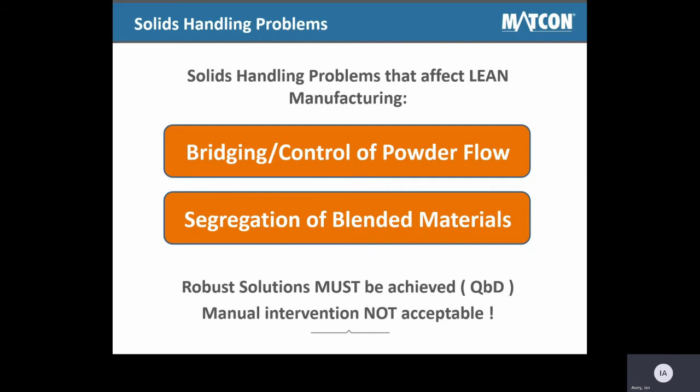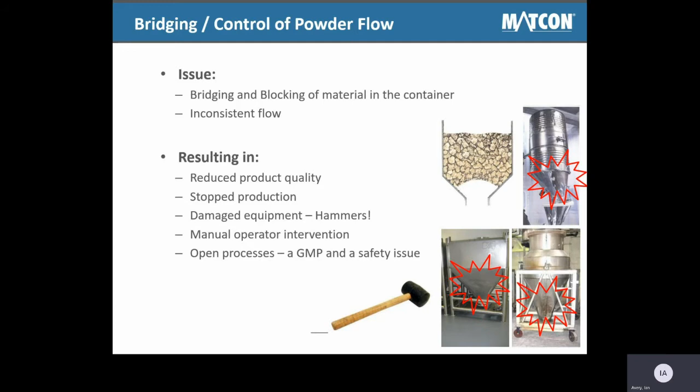These rarely are the best form of equipment care. Perhaps worse than this is the likely reduced efficiency and quality of the resulting product. How much better is a process that works consistently and repeatably without random operator intervention?

When transporting and discharging any powders, there are two primary aims. The first is that the materials can be discharged in an automated and consistent way. Repeatability of processes without manual operator intervention improves efficiencies and forms part of any ambition to work within a lean environment. The second is to ensure that the materials that are discharged are the same as those that were introduced previously into the container. This means minimal segregation of the output, a problem that can often occur when smaller traditional discharge valves are used.

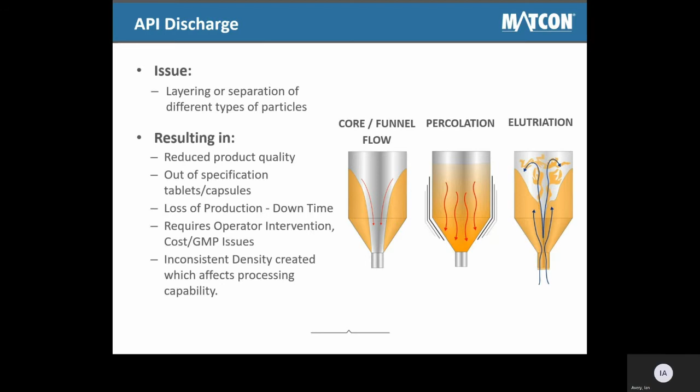So what solutions can sites implement to solve these potential flow and segregation issues? We believe the best solution is the cone valve linked to our IBC and dedicated discharge station. With gentle opening and closing, there's no degradation of product. The shape of the valve allows mass flow of the product out of the IBC. This flow negates any tendency for powders to segregate and provides consistent and repeatable discharge of products.

The variable lift height of the cone opening provides the control of discharge rate, and even the most problematic materials can be processed by the addition of vibration on the cone or the external frame. Flexibility of batch sizes can be accommodated with standard IBC volumes ranging between 300 and 3,500 litres.

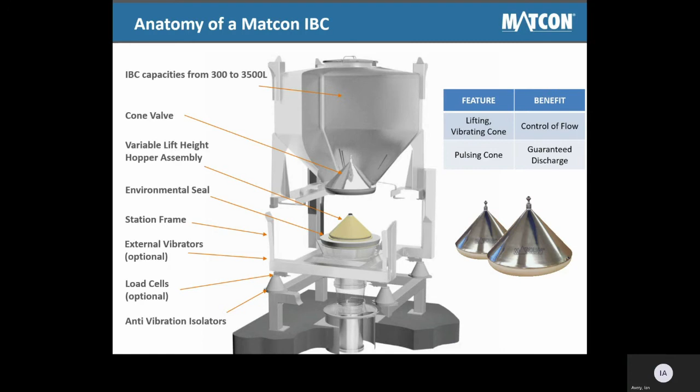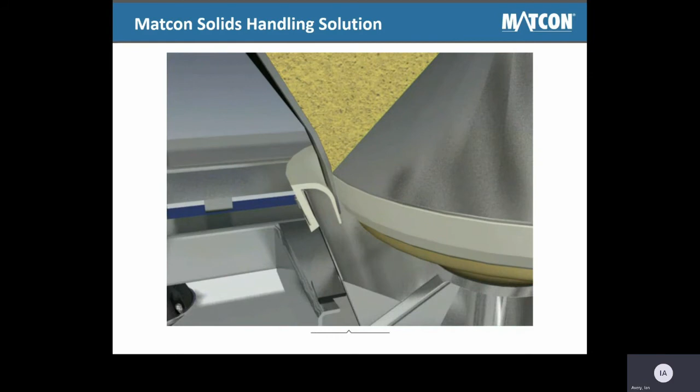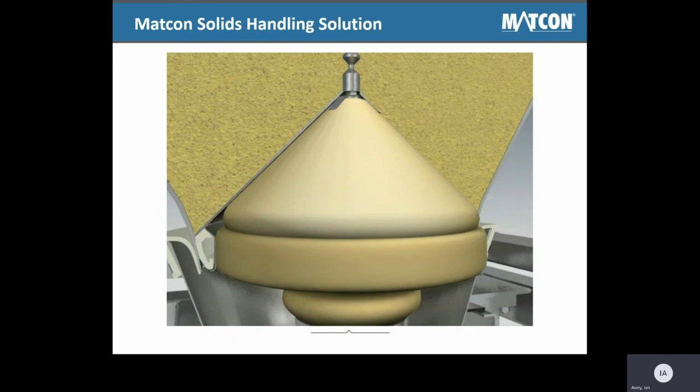Here we can see a schematic of the cone valve and discharge station in action. The IBC cone valve docks with the discharge station. This self-seals, preventing powder loss to the outside environment. All materials are suitable for a pharmaceutical environment and provide excellent access for cleaning and inspection.

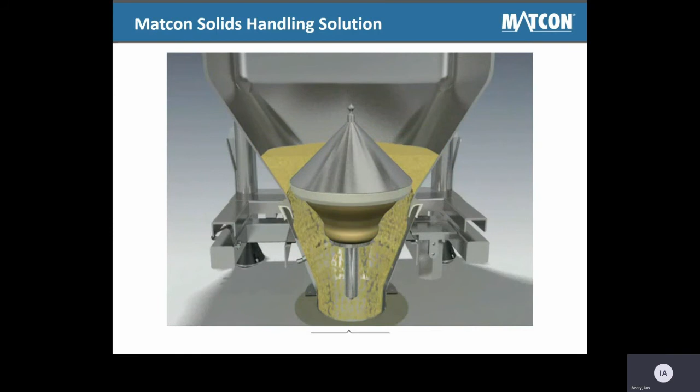The control of the discharge station then lifts the valve to a predetermined level, providing excellent control of powder flow. In this example, optional vibration of the cone aids discharging problematic materials by movement of the cone entering directly into the powder within the IBC.

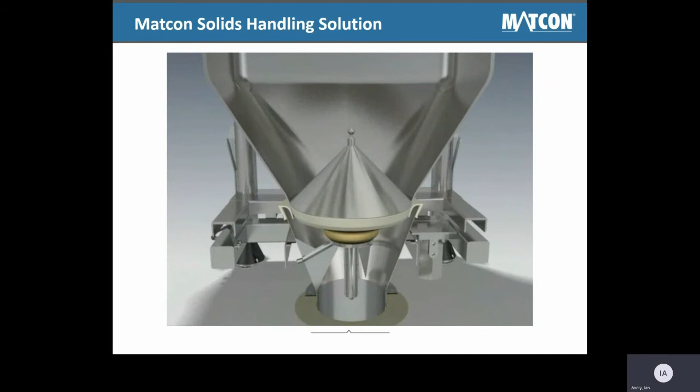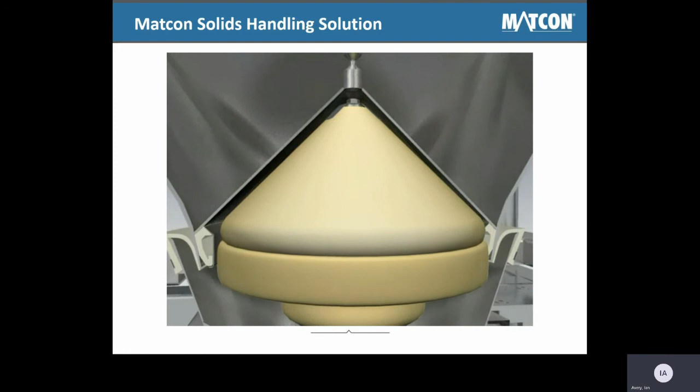Mass flow of product ensures a complete discharge without common problems of other systems such as rat holing or bridging. Powder flow can be stopped and started to feed other process equipment such as tablet presses or capsule fillers.

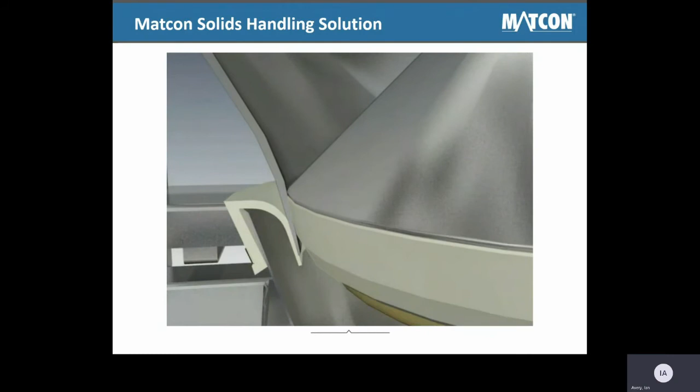On completion of the discharge, the cone valve closes and is sealed within the IBC. This helps keep the system clean and efficient, allowing best utilization of process equipment with minor operational intervention.

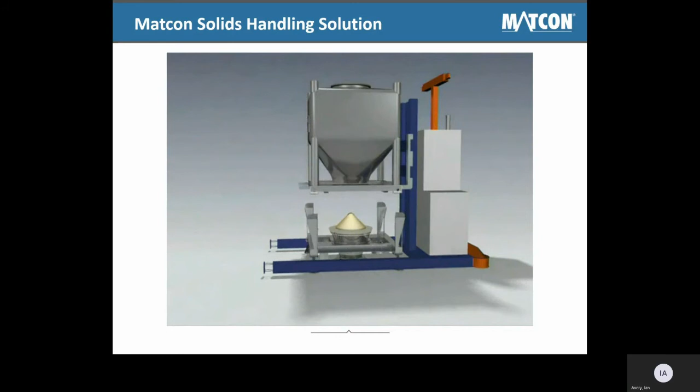In the final section of this brief presentation, we'll look at some options for layouts of pharmaceutical manufacturing plants. The first is perhaps the classic historical method using vacuum or pneumatic transfer to move product between processes. The other three examples show how Matcon IBCs and gravity transfer increases efficiency.

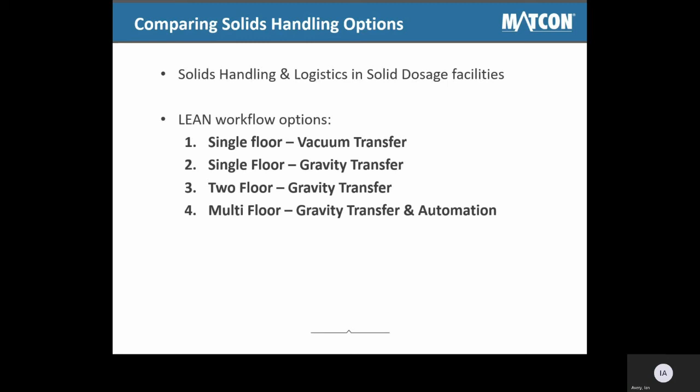So to begin, this is perhaps a classical traditional layout of some pharmaceutical sites. Materials are transferred to each process by a combination of manual handling and vacuum transfer. Although initial costs may be lower, the ongoing running operation costs can be greater. There are also risks involved in segregation during transfer and exposure of operators to product.

The use of equipment such as V-blenders also makes for inefficiencies due to cleaning downtime. The blender must be taken out of service to clean.

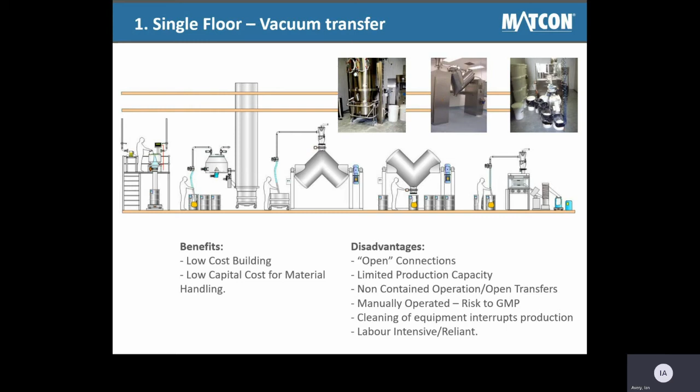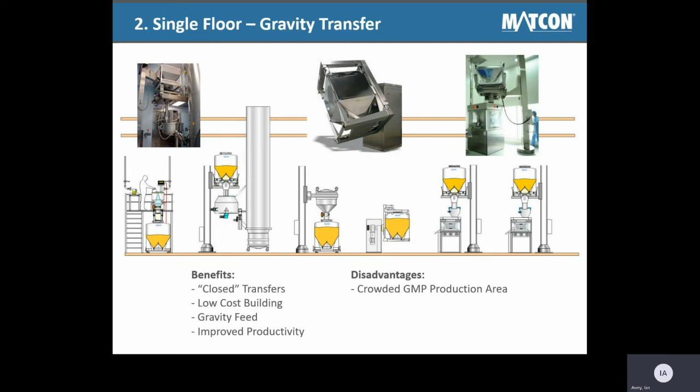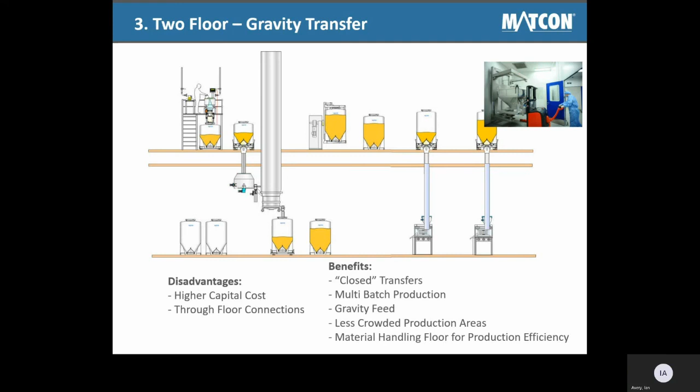Finally, for this presentation, here's an example of a multi-floor facility using Matcon IBCs. This provides the ultimate flexibility in manufacturing whilst improving equipment utilisation. From initial sack tipping of ingredients through to tablet processing, all materials are handled securely and efficiently.

In this example, the Matcon range of tablet IBCs are also shown, bringing improvements to material handling post-compression and through to coating and even packaging. The gentle handling of tablets in this way reduces manual intervention and numbers of containers compared to traditional small tablet kegs.

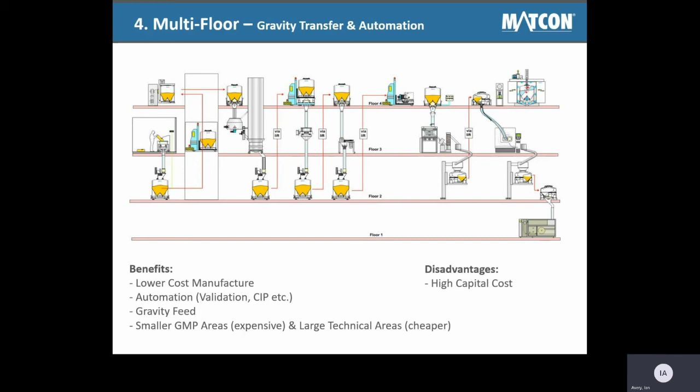Here's a simple schematic of how Matcon can improve material handling within a pharmaceutical environment. Transferring product efficiently from fluid bed in-bin blending using Matcon blenders ensures maximum equipment utilisation.

Discharging to a tablet press with the cone valve provides excellent material flow, even for difficult products, whilst negating segregation risks. Manual intervention is minimised and efficiencies and quality maximised.

This follows through also to tablet handling. These non-metallic tablet handling IBCs ensure gentle, efficient storage and movement of tablets within facilities and then onto packaging.

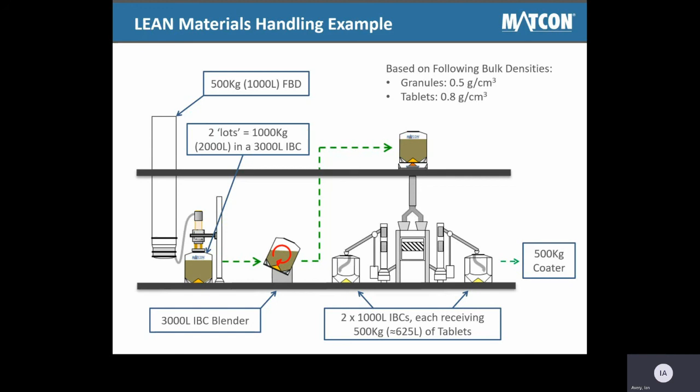So in conclusion, the Matcon system can provide pharmaceutical manufacturing sites with significant long-lasting benefits. Manufacturing costs can be reduced by improving equipment utilisation, such as blenders, and reducing manual intervention.

Efficiencies are improved due to better discharging of products through the cone valve and fewer material movements. Quality is enhanced by negating tendencies for segregation within feed powders and granules.